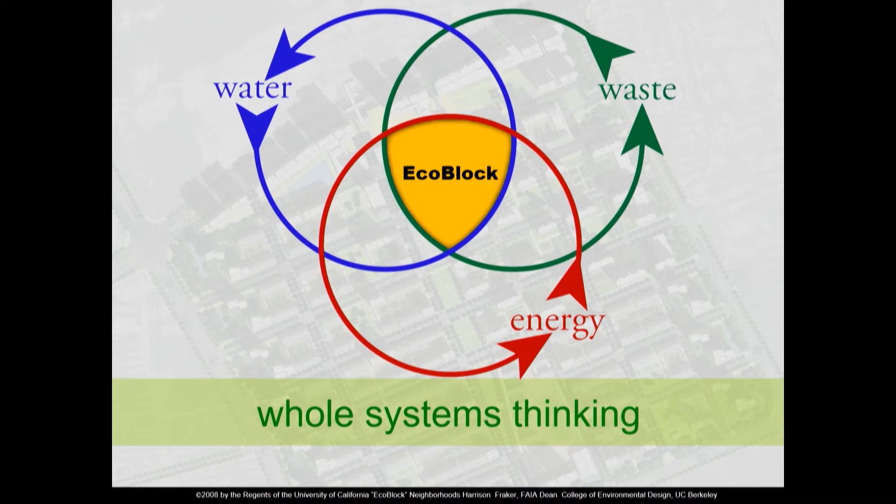To start, this is a diagram that we drew for the eco-blocks in China. It's trying to combine energy, water, and waste design thinking to create sustainability. This diagram is so out of date, and you'll see at the end that there are so many more things that need to be added to this Venn diagram, not the least of which are transportation, food, people, financing, social acceptance, policy frameworks, and institutional organization. That's the real integrated systems design problem.

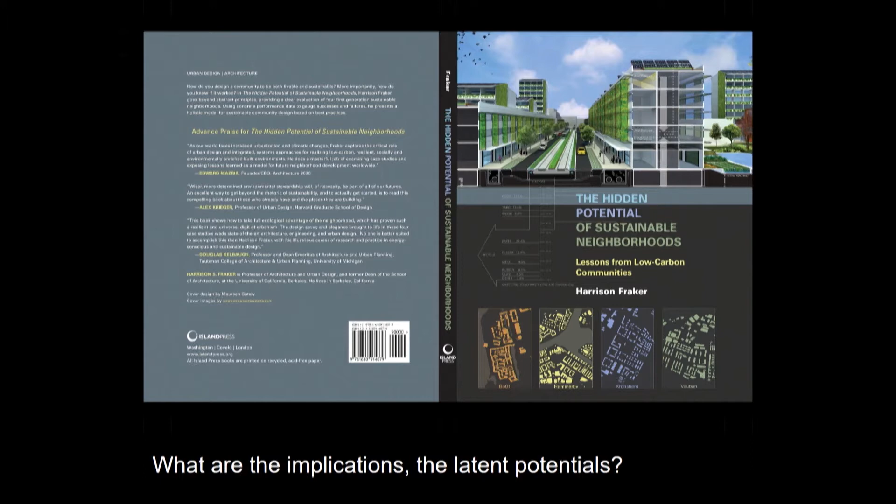A lot of the stuff I'm going to talk about very quickly is all summarized in my book, The Hidden Potential of Sustainable Neighborhoods. It was ahead of its time. What's interesting is when it was first published, not many people bought it. Now lots of people are buying it. So it just shows you that the idea of this integrated approach of systems thinking works at the neighborhood scale. Most of you know about these projects because West Village was modeled after them. I even have a chapter on West Village in this book, if you'd like to see it. It's the first chapter, about West Village.

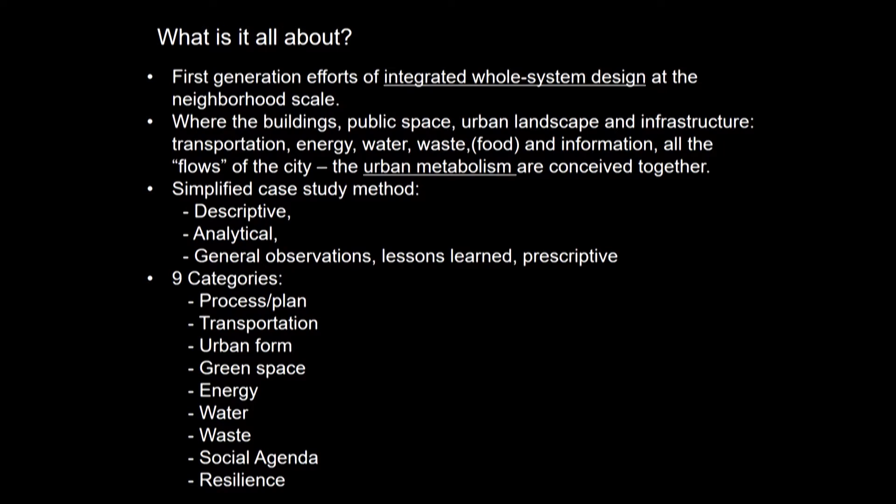So these are the neighborhoods: Bo01 and Hammarby in Sweden, Kronsberg and Vauban in Germany. We don't have to go through this, but I did analyze process and plan, transportation, urban form, green space, energy, water, waste, social agenda, and resilience for all 4 of these neighborhoods.

So let me just quickly summarize the lessons learned from process. First of all, 3 out of these 4 — Bo01, Hammarby, and Kronsberg — all had special conditions that provided lots of extra funding to promote the integrated systems thinking across agencies and departments. Without that, this wouldn't have happened. So the question is, in normal practice, where do we get the funding to ask people to do things differently? That's one really important lesson.

The other thing was the cities in Europe own the land, and they can be horizontal developers. They build the infrastructure, they build the streets and everything, and they can demand the agencies and the utilities work together in an integrated way. We don't necessarily have that. That's an institutional challenge.

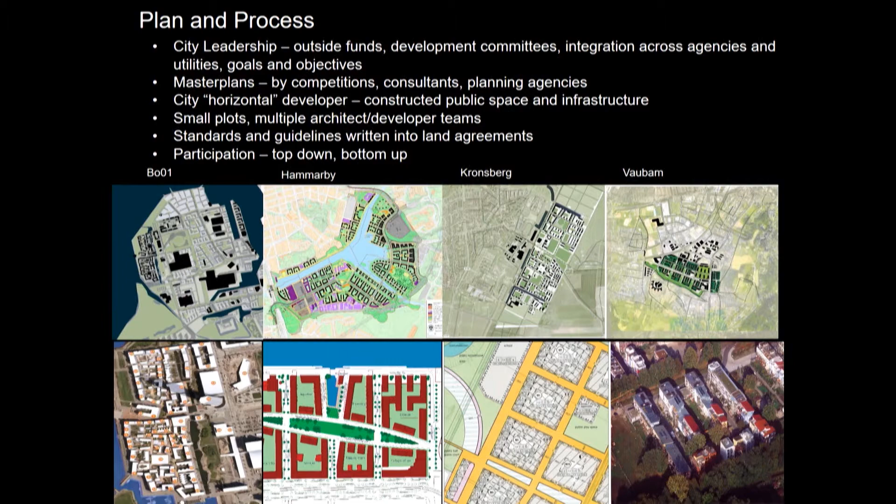The other thing was that participation by the local community was absolutely critical in achieving their targets. When you didn't have it, they didn't make it. When you did have it, they did. Very important lessons. Transportation was key.

I don't have to go through these rules here, but you have to either have tram or bus access close to all the units, good stops with information, short headways, a pedestrian environment to get there, fine-grained streets, dedicated bikes so you have a larger bike shed, a collecting area, limited parking, and it has to be affordable. We all know that.

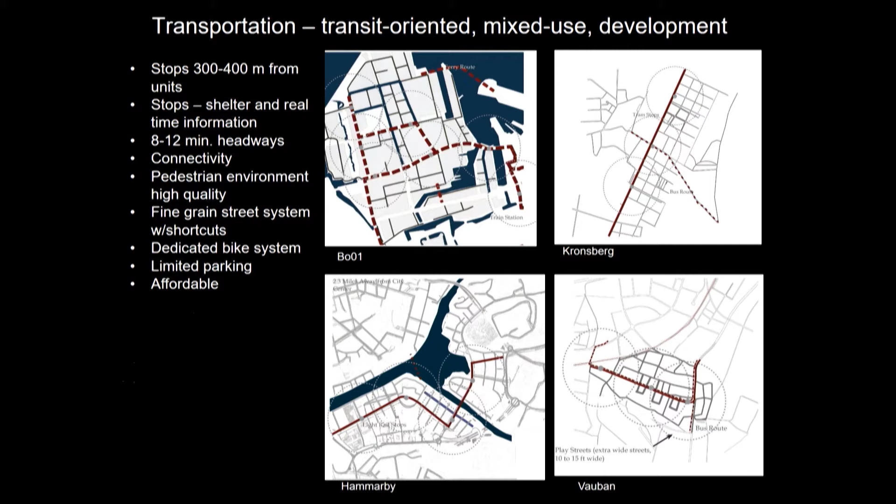I don't want to go into the urban form, it could be a whole lecture. The main takeaway has to do with needing a street block building type density that can support transportation, local shopping and commerce, institutions, schools, so you have an integrated community. If you don't have enough density, it's kind of a bedroom situation. So that's very important.

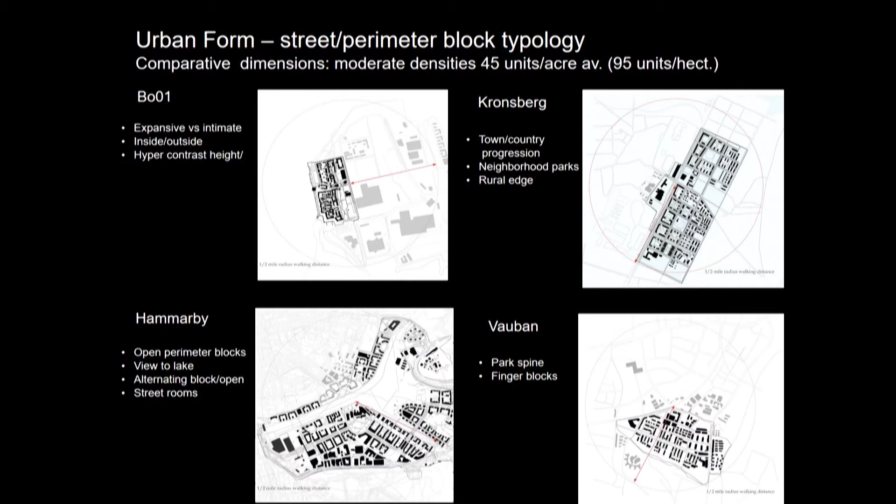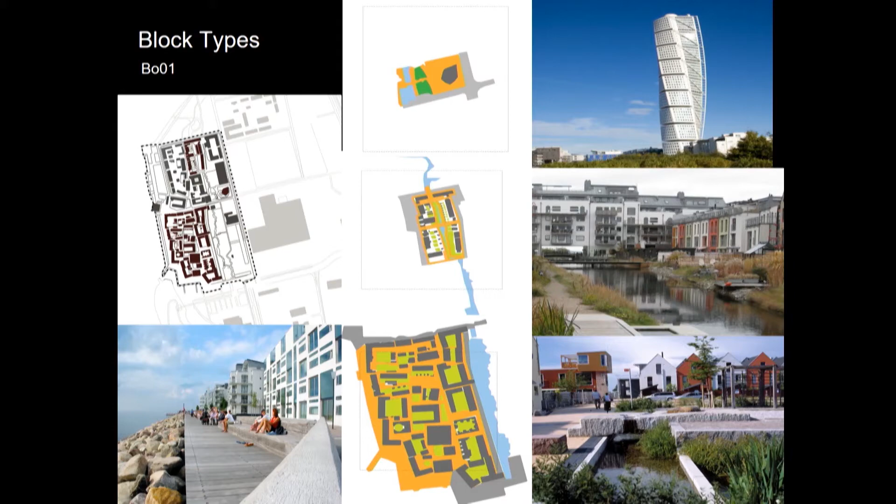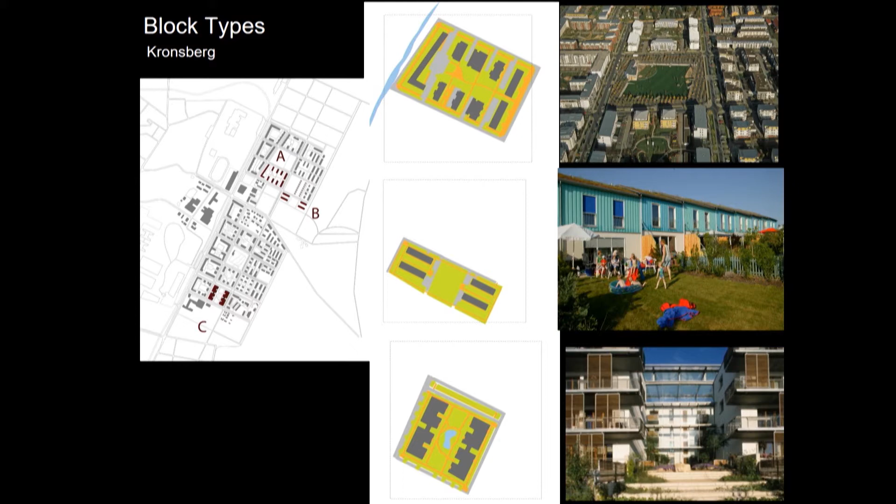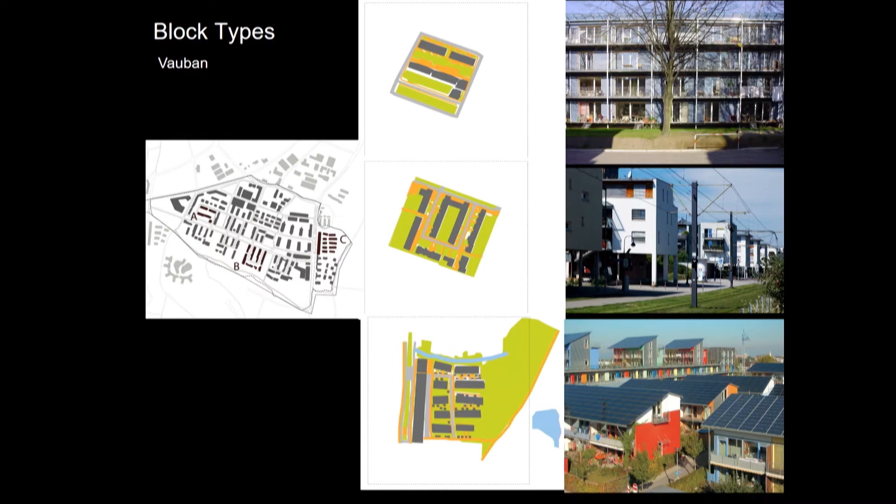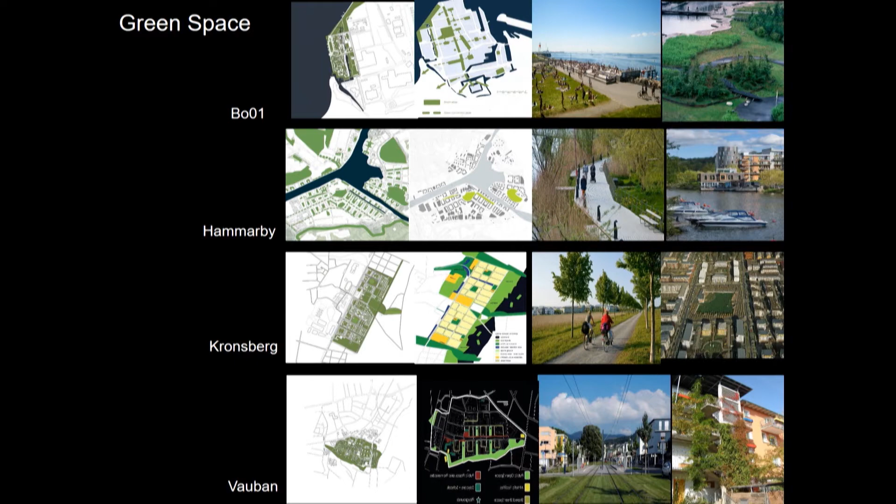One key thing essential for these sustainable communities is the provision of green space. Every single one of these has much more green space than is typical. You can see it quickly in these diagrams, and there's a specification: so many square feet of green space within such and such a distance from units, and they even said half of the surface area needed to be living. So it has been one of the biggest reasons why these communities are so cherished - while they have an urban density, they have incredible access to green space.

What does that remind you of? UC Davis.

I could spend a lot of time on this diagram. This is the energy performance. What's so interesting about these neighborhoods: the first one, Bo01, has wind machines driving ground source heat pumps. They did a terrible job - oh, by the way, I only went to these places because I had performance data, I could get real results. So they had a target of roughly 100 kilowatt hours per meter squared per year. Bo01 missed it by 50%. That's because they had to rush the construction and there was too much air infiltration. But they had such a good local renewable resource that they're 100% renewable.

If you take Hammarby - no wind, no sun - it's the best example of using waste to generate energy, a very seminal discovery on my part here. They also missed their energy efficiency target by 50%, because they all wanted big windows and views of the lake.

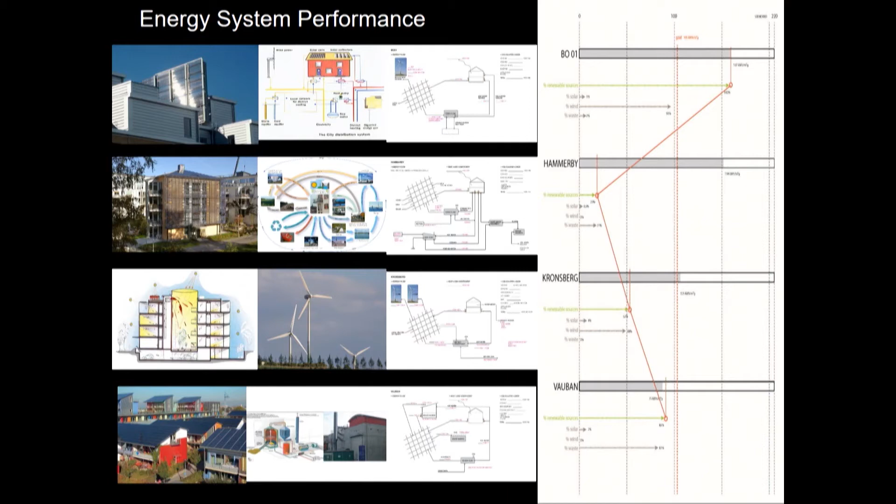Then we come to Vauban. Amazing, incredible process - I'd love to lecture on this for a long time. They sold the development plots to cooperative housing groups called Baugruppen, and they were able to be their own developers, contractors, designers, and they shared information and competed. Every single one of these beat the energy targets. And then they used solar and wood chip combined heat and power for the neighborhood. So it's the closest thing to a complete job.

What about water? Not too creative in the water part. They treated stormwater, collected it, held onto it, used it as a design feature. It became an amazing attraction for all of the communities. So stormwater, as you know in West Village, can be a real identifying quality for the neighborhood that people value. An important thing to include.

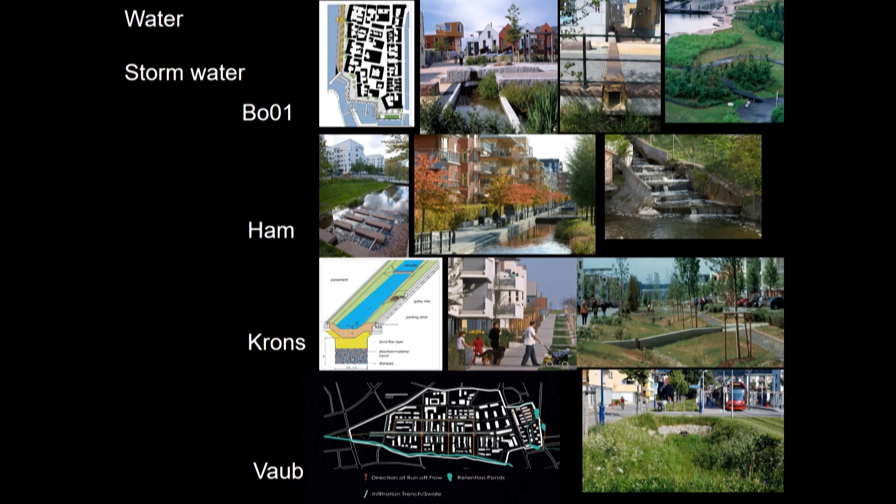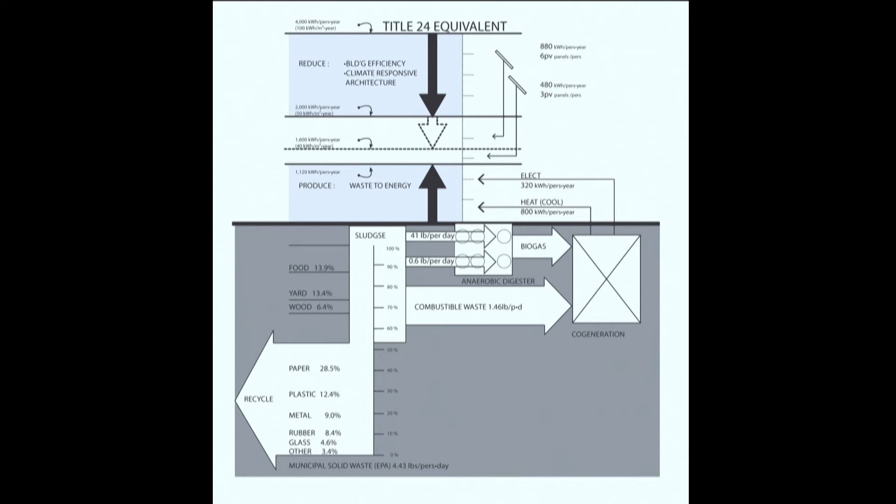How am I doing? We could talk about this diagram. As a result of those things, what I did is I showed all the waste, which is in the gray area in the US - how you can use combustible and biogas to run electric turbines, and you can see how you can get energy from waste. As the base there, you can do efficiency aggressively, and then you have a very small amount you need to make up with renewables. Suddenly it's affordable, easy to achieve, etc.

Let's talk about the eco-block quickly. Frustrated in China, I wrote this book and became chair of ERG. Let's make a difference—let's see if we can do an eco-block in Oakland as a retrofit project.

Lots of people are involved: Berkeley faculty, Stanford faculty, professionals in all the disciplines, and lots of money from an engineering company and foundations to help make this happen. It's a 30-person interdisciplinary team, a lot of work.

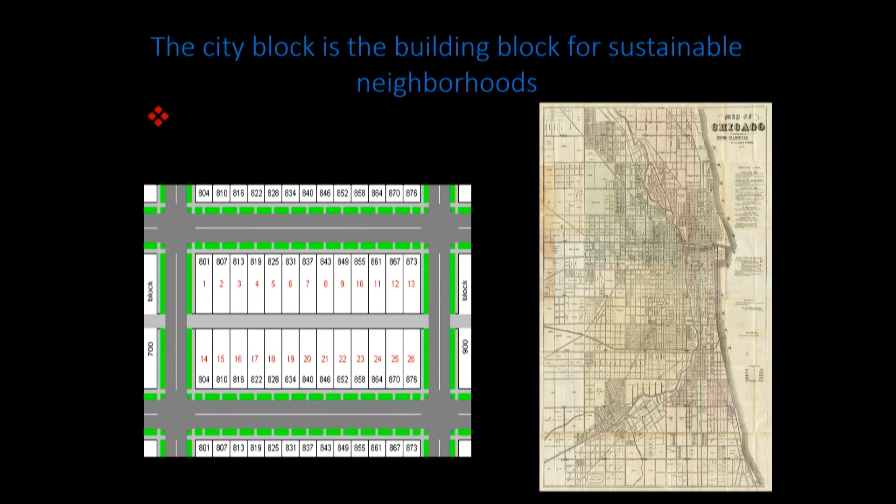Why are we interested in retrofitting these first ring suburbs? It represents 40% of the housing stock in California. If we don't reduce the carbon emissions of that part of our economy, we have problems. And we don't get really good energy efficiency in those areas because if you do it by itself, it doesn't pay out.

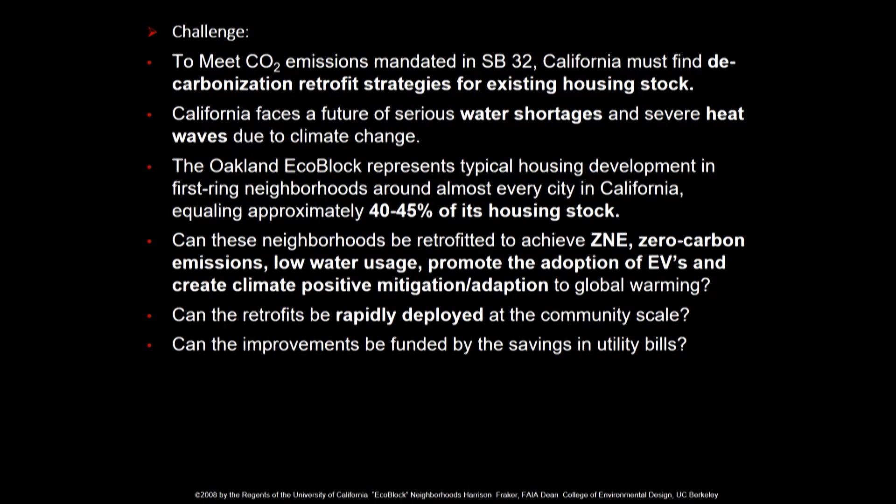So you could read through this quickly. As I said, 40 to 45% of the housing stock. Could we get these to zero energy, zero carbon, low water, and EV charging vehicles? That was the question. And could we do it in a way that was economical and scalable?

I'm not going to go through everything. So this is the system—it's pretty simple. The first thing you do is deep energy efficiency retrofits, including fuel switching from gas to electric for heating and hot water.

Then you have community solar on those roofs that have good exposure. It's a DC backbone, so you don't need the inverters, going to a vacuum flywheel storage. It then goes back to EV charging or to street lights. Then it goes to an inverter, which can go to the grid or back to the houses.

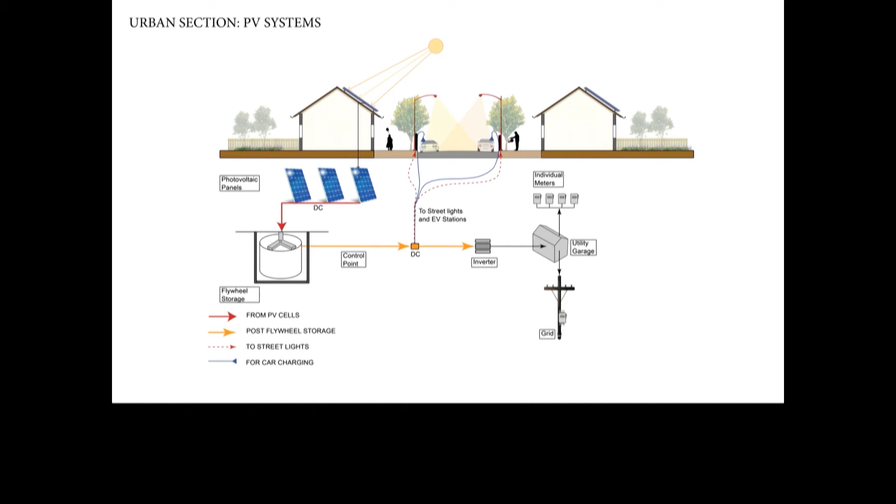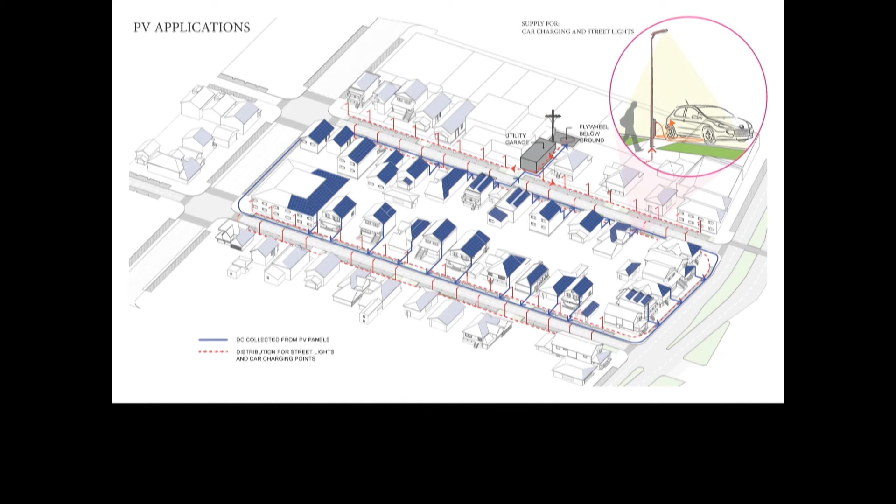So this is a microgrid, a DC microgrid concept. You can see it running around a block in Oakland with one kind of little service thing.

What about the water? Again, the first affordable thing to do is water conservation—a huge thing. Rainwater, believe it or not, even though we have so little of it, actually pencils out for use in the homes if you treat it and put it right back into potable. There are some zoning code problems. The question is mining the sewer.

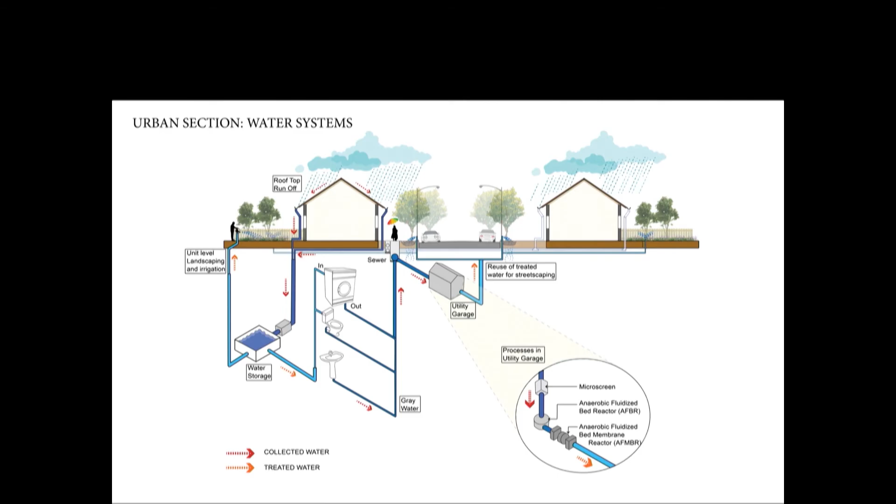We looked at this initially because we think the microclimates, especially in the Central Valley of these neighborhoods, are really critical—they need 10 times as many trees. Where do you get the water? What's the biggest water resource in California? Wastewater. Mine the sewer, treat the wastewater, change the microclimate. That's integrated systems thinking.

Almost there—so here are all the benefits. Cash flow savings from the utility bills pay for all the improvements. They fund the conversion to locally distributed renewable energy with built-in storage that really helps the load profile for the utility.

The energy savings from the efficiency retrofits create enough capacity in the PVs to charge EVs for roughly 40% of the vehicle miles traveled. The renewable supply is enough to allow the fuel switching and increased comfort in the home.

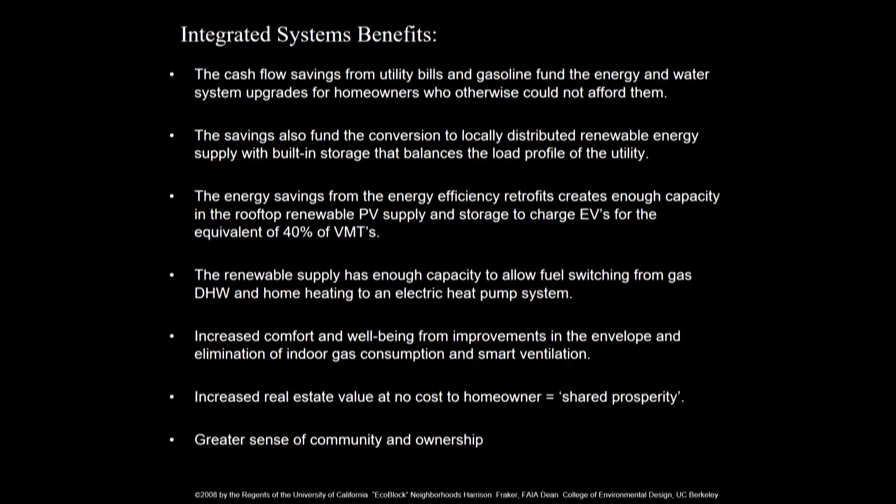That's really important—increased real estate value because we've upgraded these things. So what happens here is the integrated systems thinking about the financing.

If you just try to do the energy efficiency, it's too expensive. If you create enough capacity from the energy efficiency to charge vehicles, the savings in vehicle miles traveled help make it possible to fund those deep energy efficiency retrofits. So this is where using the whole household budget, not one thing at a time, makes sense.

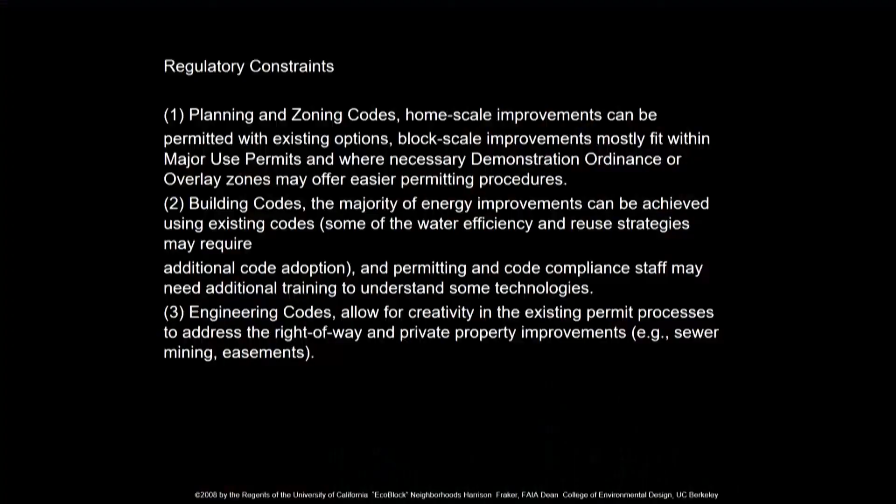All of this can be done under most of the codes. We have a very interesting financing and governance model. We're using CFDs—community facilities districts—for the infrastructure, and PACE for the improvements inside the homes. We're using the JPA to create an eco-block trust to organize the whole thing.

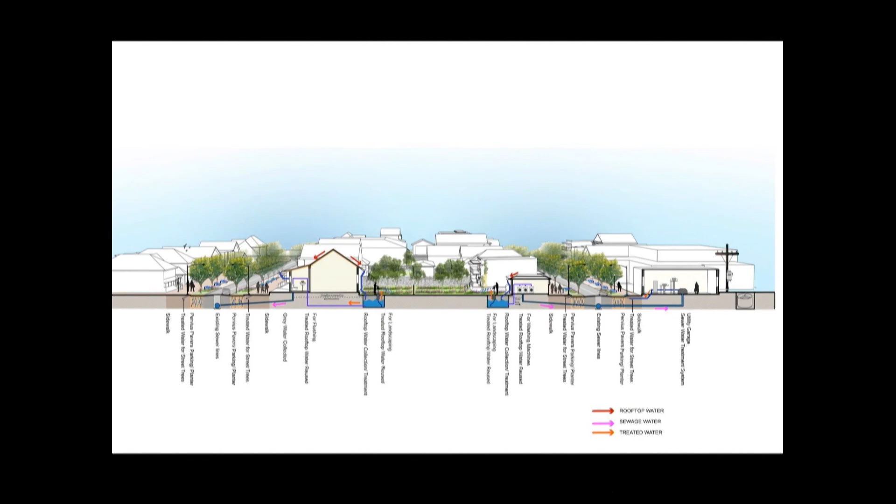And that's what we're going to do in the first one. I'll go quickly to the last slide. We're currently selecting the final block and will establish all of the necessary legal entities.

So in conclusion, while the integrated systems thinking works technically and across the financing domains, the biggest challenge is really the legal, institutional, and social governance models for these kinds of neighborhoods. That's, I think, the work we have ahead of us. The technology we know works—it's how we organize to implement it. Thank you.